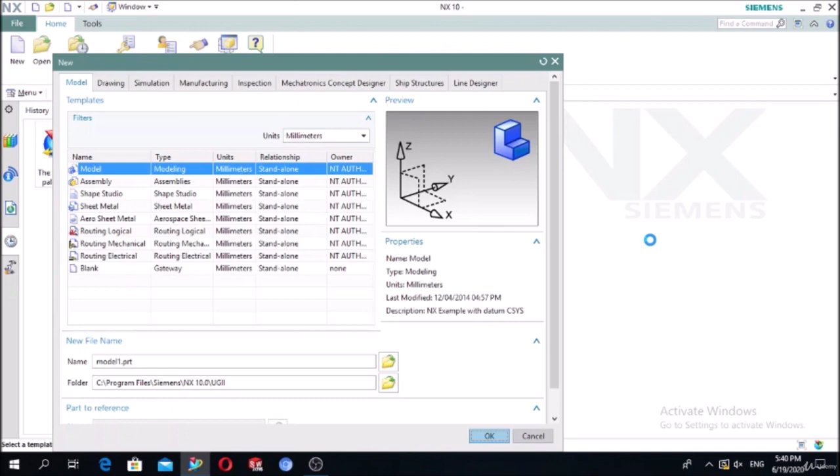The extrude is a process of taking a two-dimensional profile and converting it to 3D by giving it some thickness. A simple example of this would be taking a circle and converting it to a cylinder.

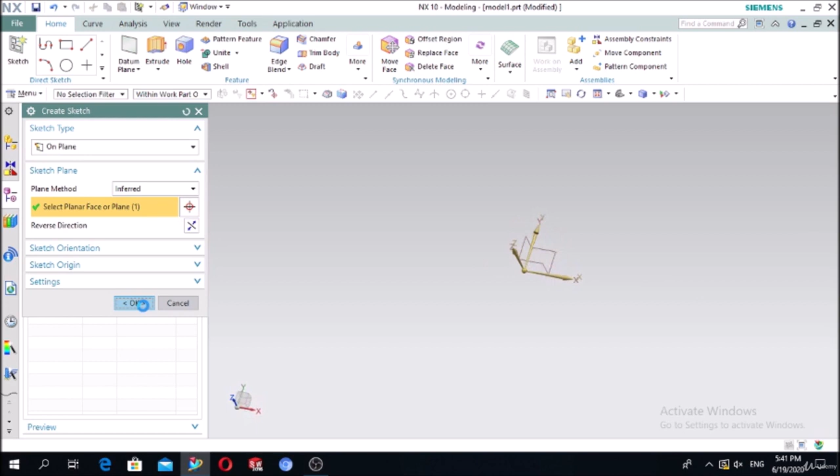Once you have created the sketch profile you want to extrude, activate the extrude command. So let's first draw a simple two-dimensional sketch. Select the plane, press OK. Let's draw the first rectangle and put the dimensions. For example, here is 150 millimeters and the height is 80 millimeters.

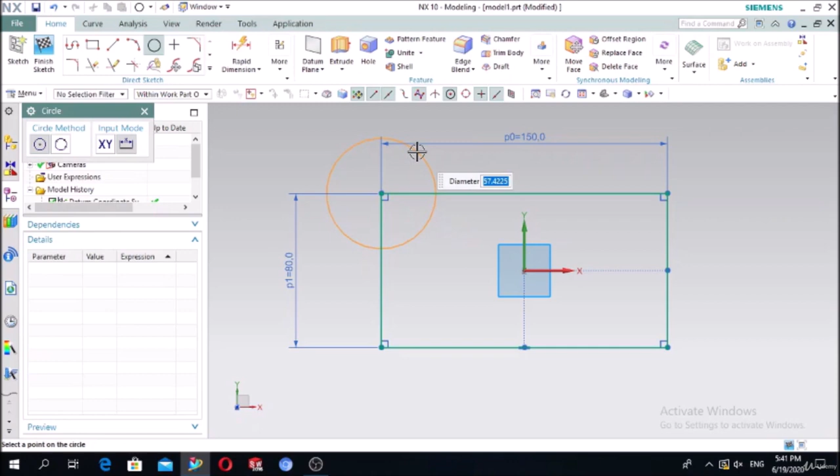Then, for example, we can add the circle by the center, and put the dimension for the circle. For example, you can make it 70 millimeters.

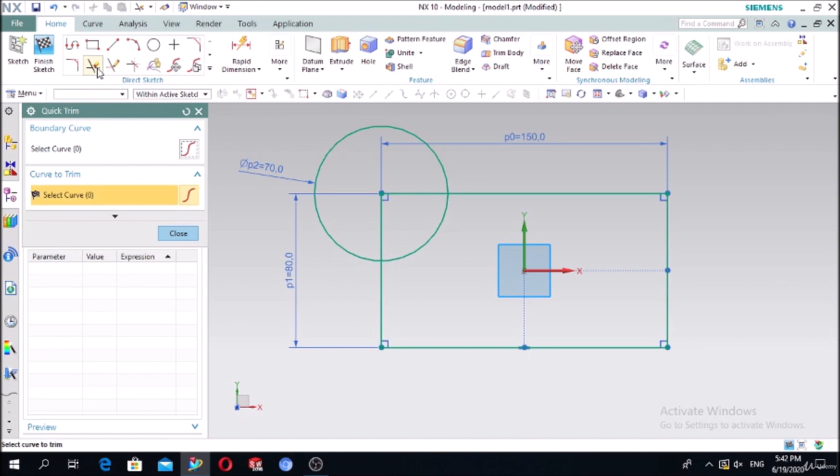If you extrude this sketch, it will not be extruded because there is an intersection between the circle and rectangle, so it will not extrude. In order to extrude, your sketch should be unique and closed. So we will use the quick trim function to cut off the unnecessary sketch, this one and this one. Now it is an open system, and this is a totally closed system, and we can make the extrude.

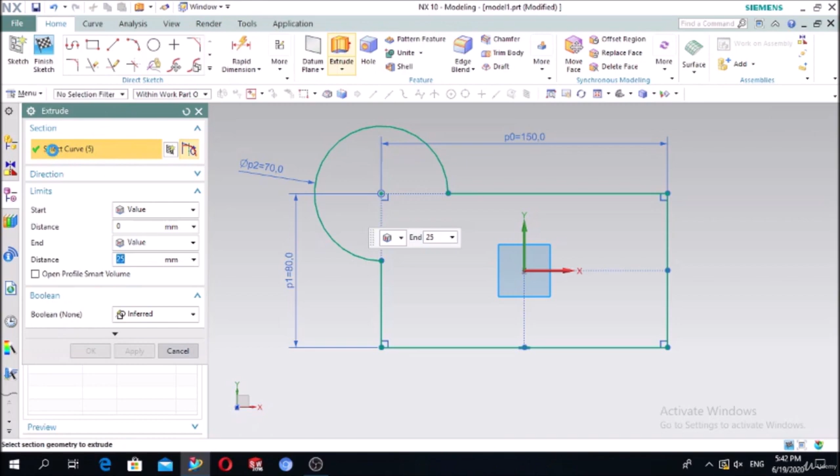In order to make the extrude, in the ribbon bar there is the extrude function, press this. In the select a curve option, you have to select the curve. It's automatically selected, you see here it's selected.

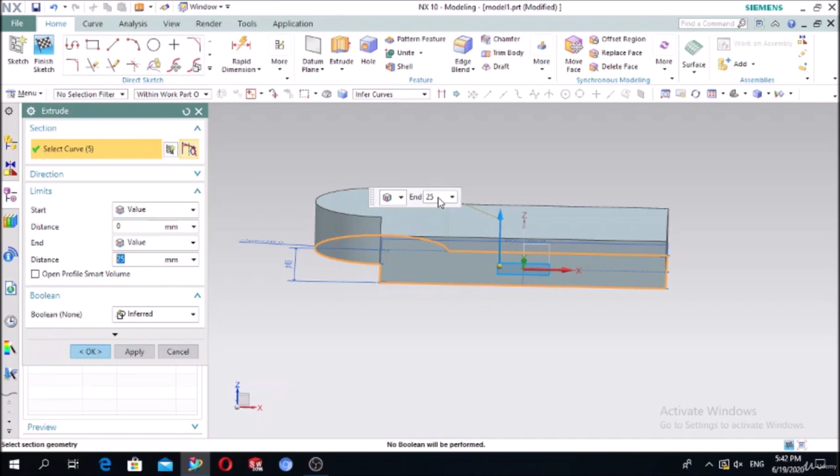Here you can define the thickness of this sketch. In this case it's 25 millimeters, in the upward direction. If you press OK, you will get a solid function extruded from your sketch.

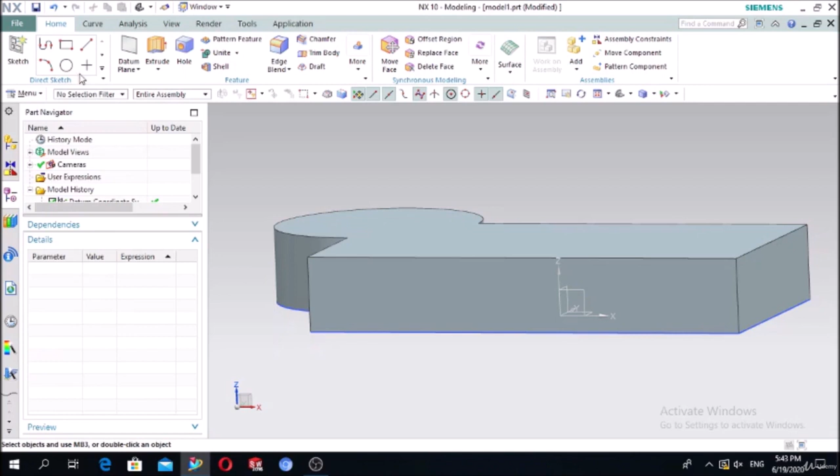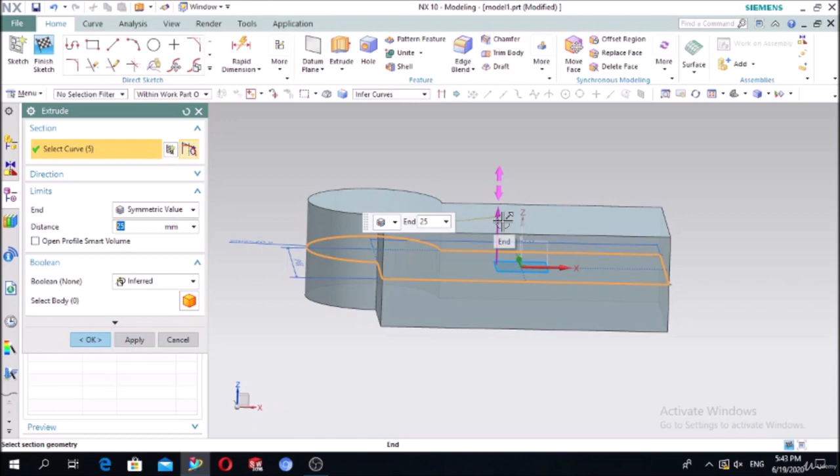In a similar way, if we return to the sketch, we can make symmetric value options in the dialog bar. If we press extrude and open the start point option, there is the symmetric value. If you select the symmetric value, the sketch will be made symmetric, 25 millimeters upward and 25 millimeters downward extruded, so the total will be 50 millimeters.

So if you press OK, you will get the extruded sketch with 50 millimeters in width.

Next is the revolve feature. Revolve is a process of taking a two-dimensional profile and revolving it about the center line to create three-dimensional geometry shapes that are axially symmetric. While creating a sketch for the revolve feature, it's important to think about the cross-sectional shape that will define the 3D geometry once it is revolved about an axis.

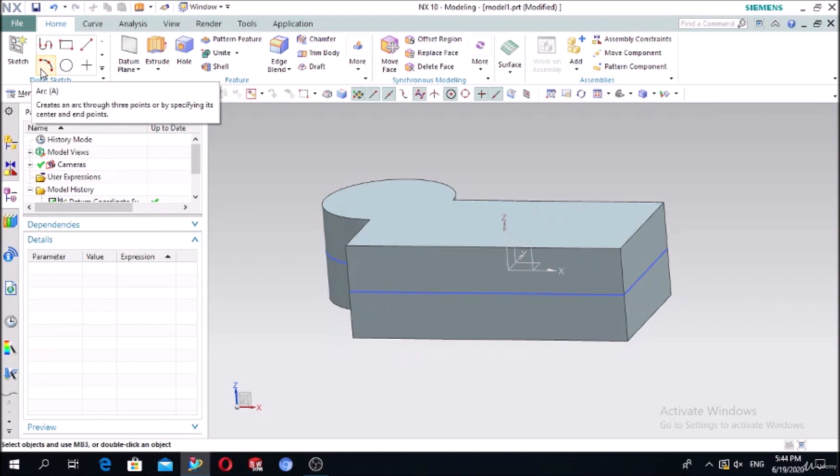So let's open a new file. Let's first delete this extrude, select the extrude, delete this sketch. Sketch, select plane, press OK.

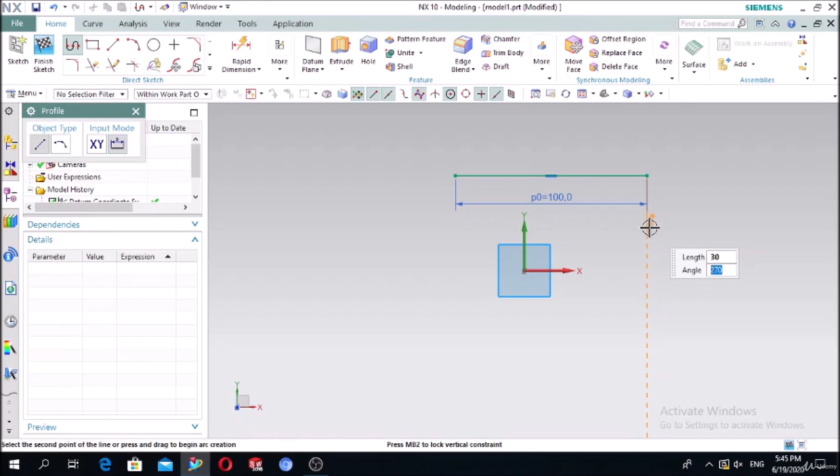In order to make the revolve, let's first draw one simple sketch. Let's select the profile and draw a line, let's make it 100, and draw one line, let's make it 30 millimeters, 30 millimeters, and this one, let's make it 33.

Downward it is 50 millimeters, and here we can make the same length, and this one also let's make it 40 millimeters, and this is the same length, and this one too, and this is let's make 33, and it is let's make it 50, and vertical, so 90 degrees.

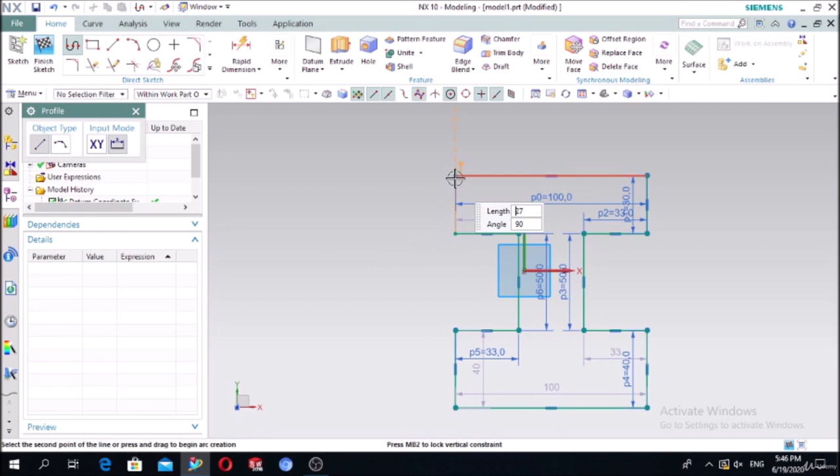This one and this one. Okay, we've drawn the sketch.

Now let's draw one line here, it's a center line, in order to make the rotation around this axis, and convert it to the reference, and the distance between this and this is 25.

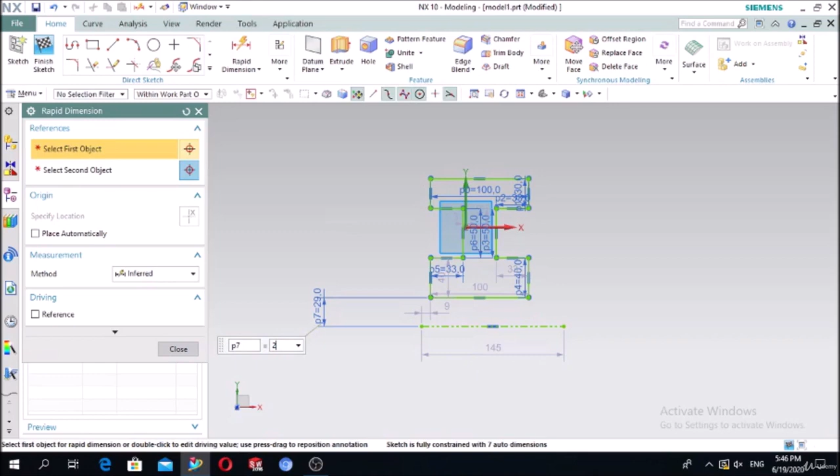Okay, 25. And if you open the extrude menu, there is the revolve function. Press the revolve, and for select the curve, select this curve, it's selected automatically by NX.

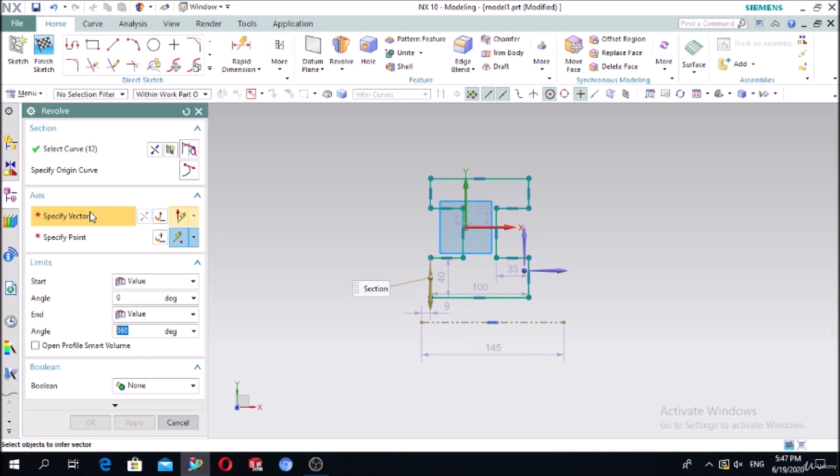Specify the vector. For the axis or vector, select this axis, so it's the axis of rotation, and you see the sketch is revolved around this axis.

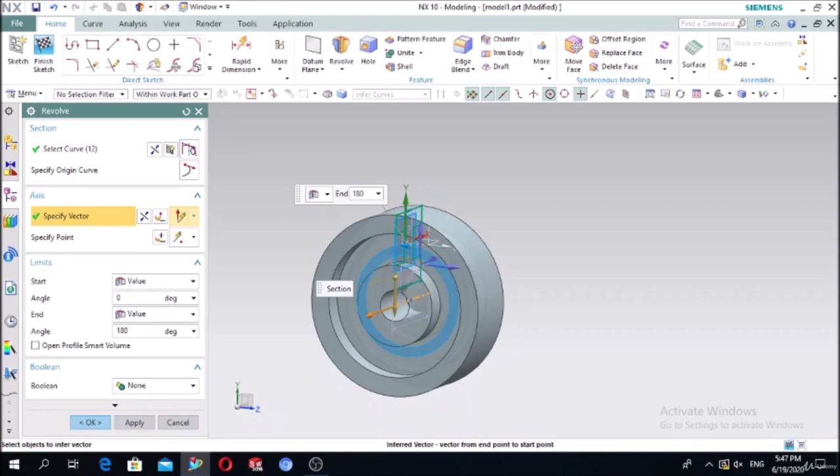You can set the angle of rotation. In this case it's 360 degrees. For example, if you write 180 and press enter, you see it's half, 180 degrees, or you can make it something else.

270 degrees. So you see this is revolved around this axis, so this is the revolve function.

In the extrude function, there are several additional options for the extrude command to be added to the three-dimensional geometry. Now we will see these functions.

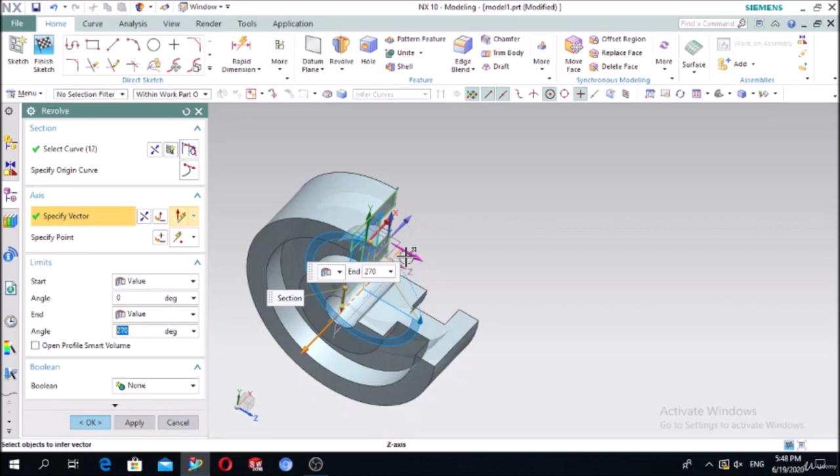So you see this is revolved, let's delete this one and delete this one. Let's select a new sketch, for example select this plane and press OK.

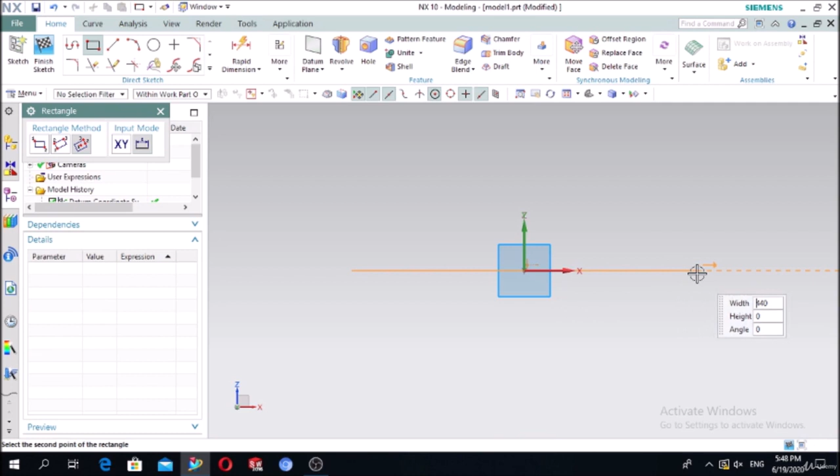Let's draw a rectangle using 3 points from the center, and put the dimensions using the rapid dimension. For example, the length is 200 and the height is 150.

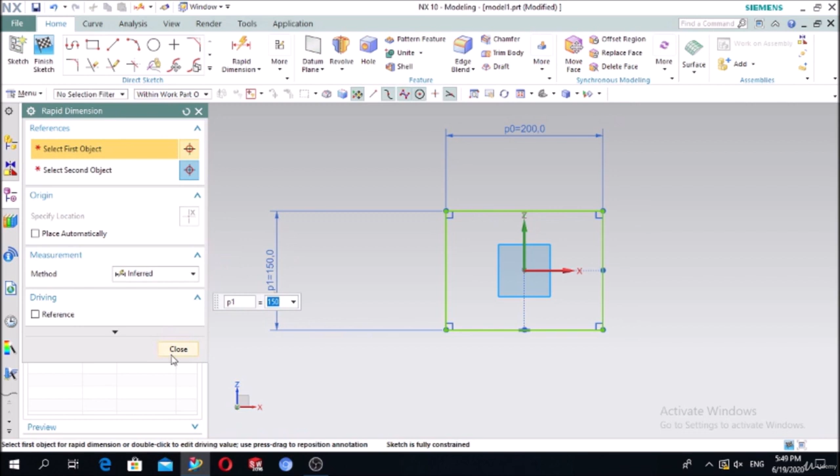Then extrude it 50 millimeters, select distance 50 millimeters, so it's extruded. Press OK.

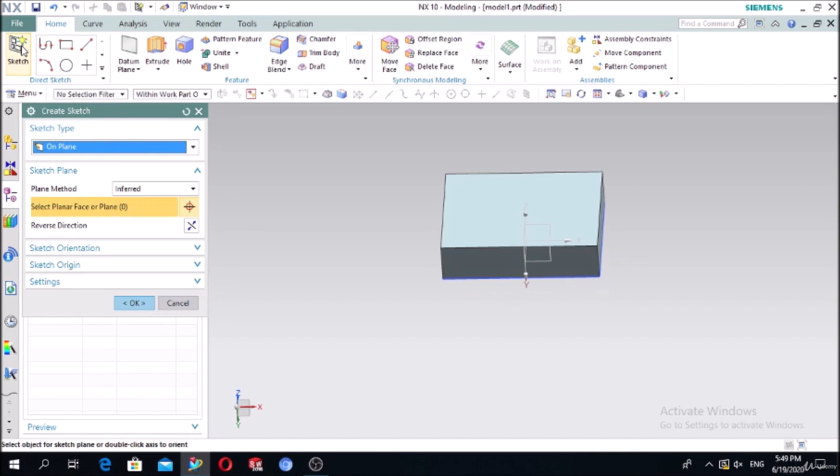Select the sketch again, select this face, you see it becomes red. Select this face and press OK. It will be normal to this face.

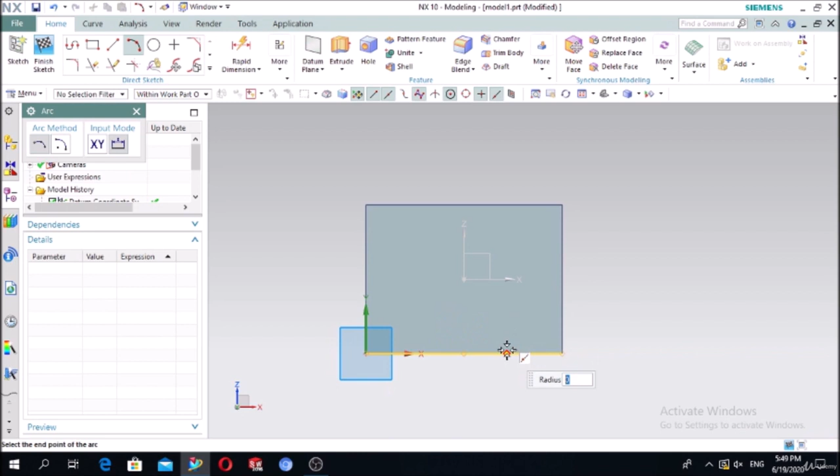From here select the arc using 3 points, so draw the arc. Put the dimension for this arc, for example the diameter is... diameter, 90 millimeters. Also you can make this symmetric.

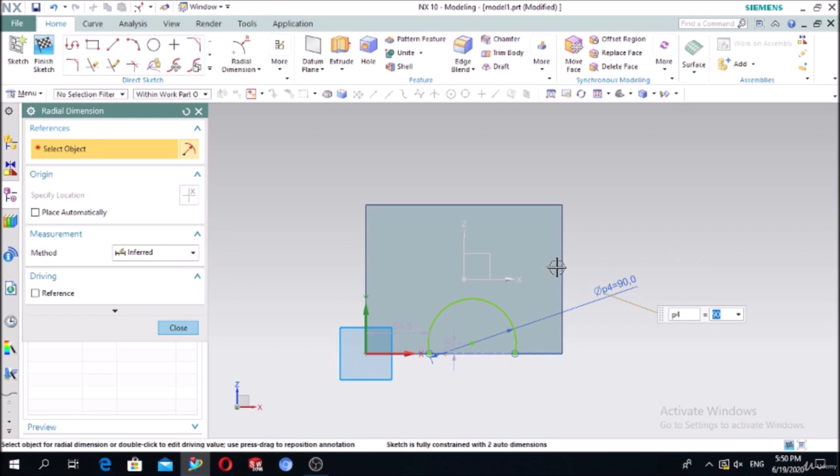If you remember, there was the symmetric function. You can make this one and this one symmetric around this x-axis. It will become symmetric.

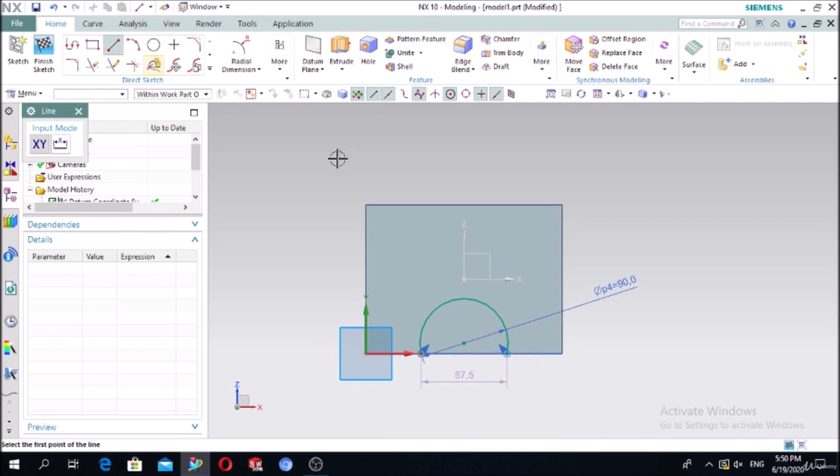So now I would like to extrude this arc, but in order to do this, first we have to close it. So I have to close this point using a simple line. Now you see it is closed, and I can extrude. If I don't close this line, the arc will not be extruded.

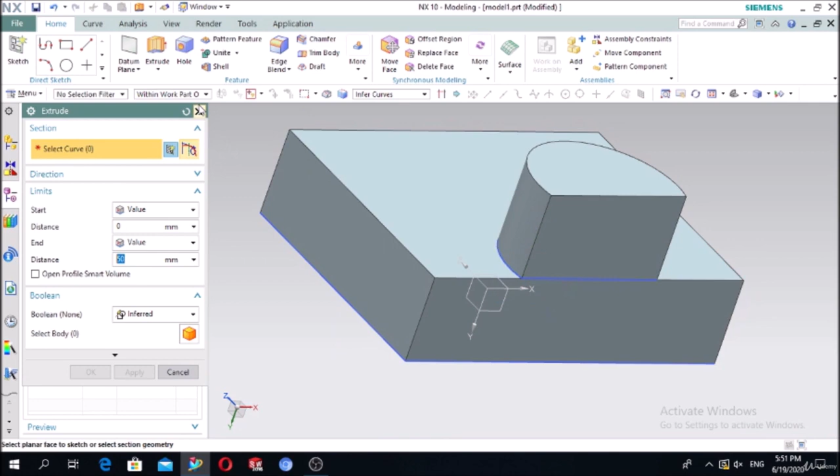So extrude, you see it is extruded. This is one way of drawing more complex shapes. So another way, for example, let's close this extrude and close this one. Okay, I will show one more thing one more time.

Extrude this arc, and here you see in the boolean there is the unite function. It means if you press unite, and in the selected body you select the rectangle that was extruded before, it will unite the two elements. They will become one element.

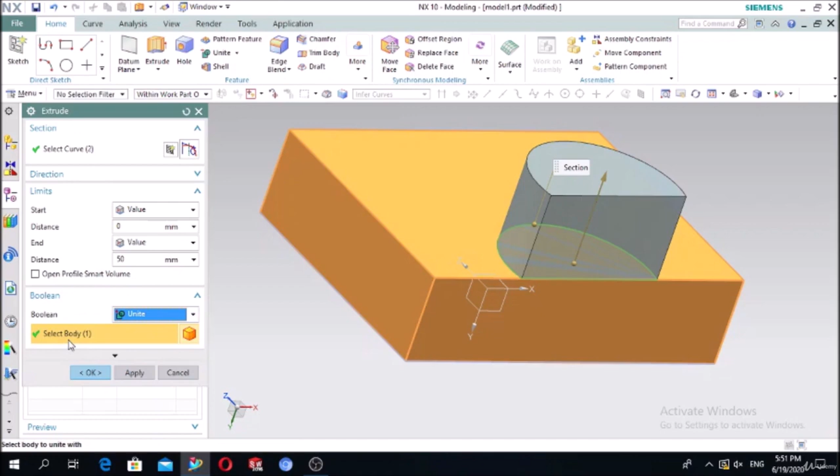So always when you make this kind of sketch, you have to make unite of two elements. Press OK, so this one and this one become one element. Select this one, from here select this one and delete. Let's remain this arc.

Let's now see how to make cut/subtract options. So select the extrude, and for the curve select this arc, and from the boolean you see here the subtract. The direction is upward. From the extrude function, open the direction and make reverse direction, so it will be downward. If you press OK, this arc will be subtracted from this rectangle.

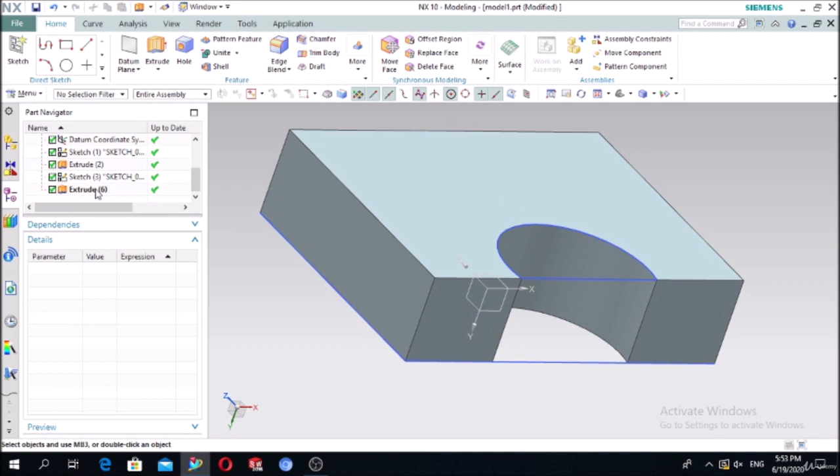This is one way of making the subtraction option. So let's delete this one and remain the initial rectangle. Press extrude again, select this arc, make reverse direction, and open the boolean, there is the intersection function. If you make the intersection and press OK, this rectangle will disappear. Only the remaining part will be the intersection between the arc and the rectangle, so the arc will remain.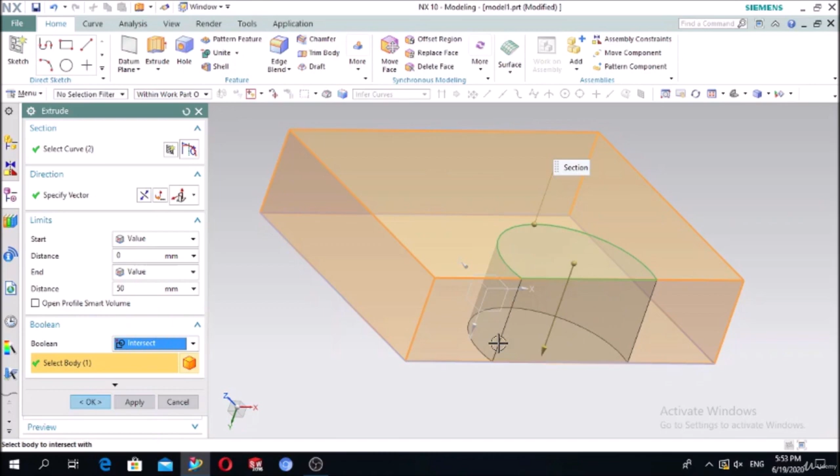So you see it is an intersection. We have seen unite, subtract, and intersection. This is the methods of boolean in the extrude function. Next are other functions, called limits.

On the extrude dialog there is a limit section, with a starting and end point. The limit section has various options to define the start and end limits of the extrude feature. If you open the start point, we have seen the symmetric value only, and we will see the other options in the limit, both from the start and from the end.

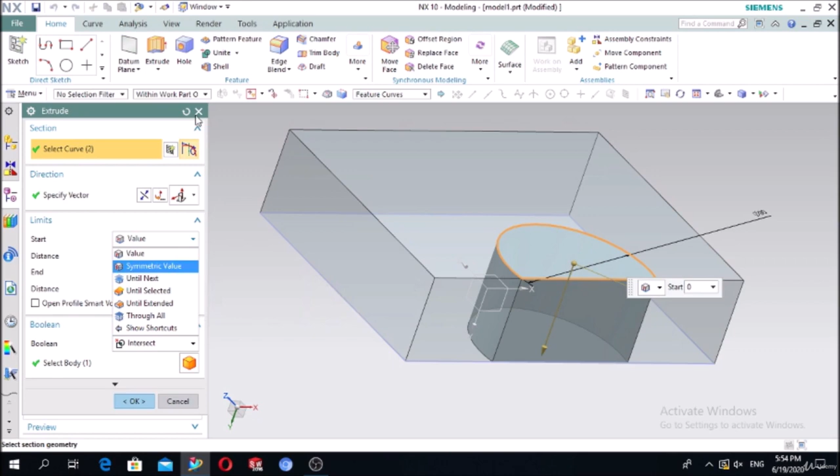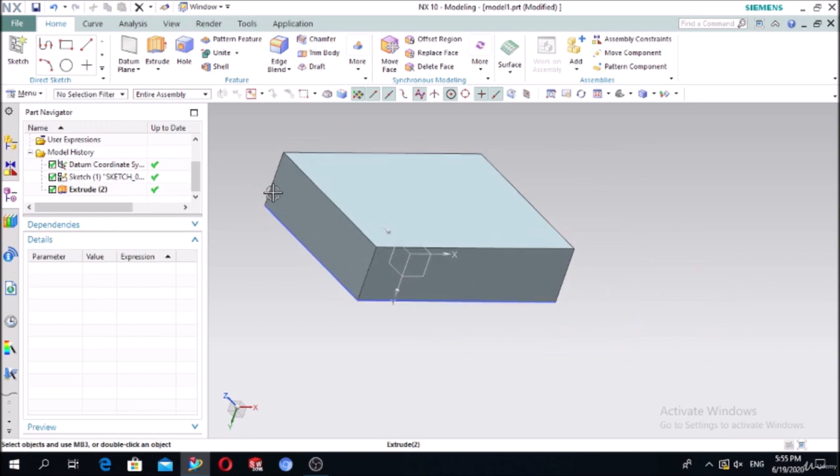Let's start with the first one: until the next. In order to see how until the next is used, let's first draw one rectangle. Let's delete this one and delete this one, and let's remain this rectangle.

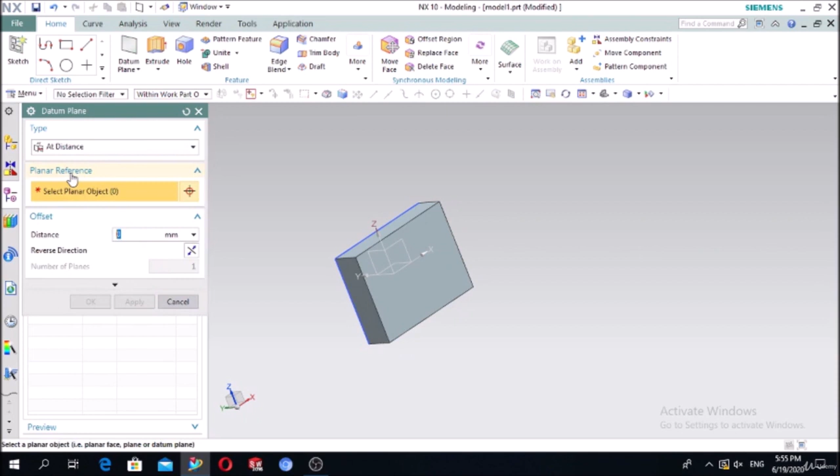Here you see the datum is an additional datum plane. We will see how to put additional datum planes on existing sketches in the next lesson. Now let's select datum plane from here at a distance, and select this plane, this face, and set the distance, for example 40, or bigger, 80. Let's draw two datum planes and press OK.

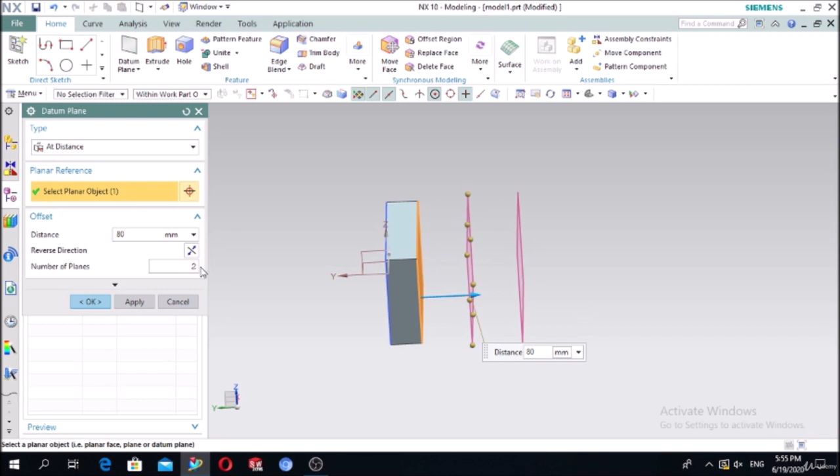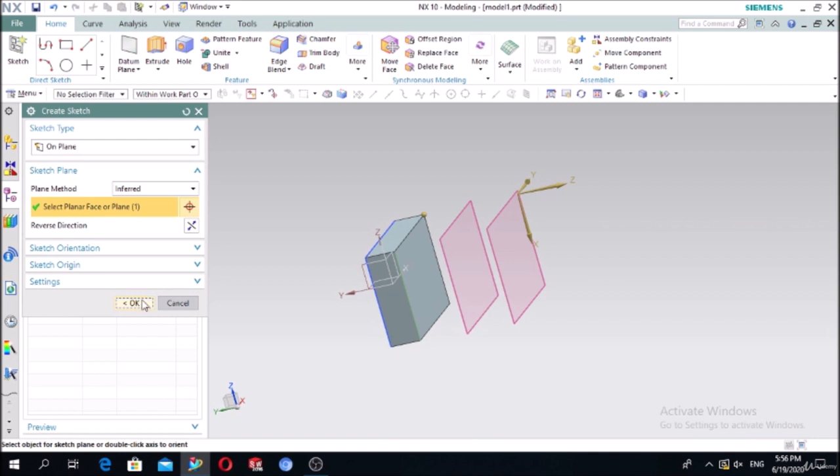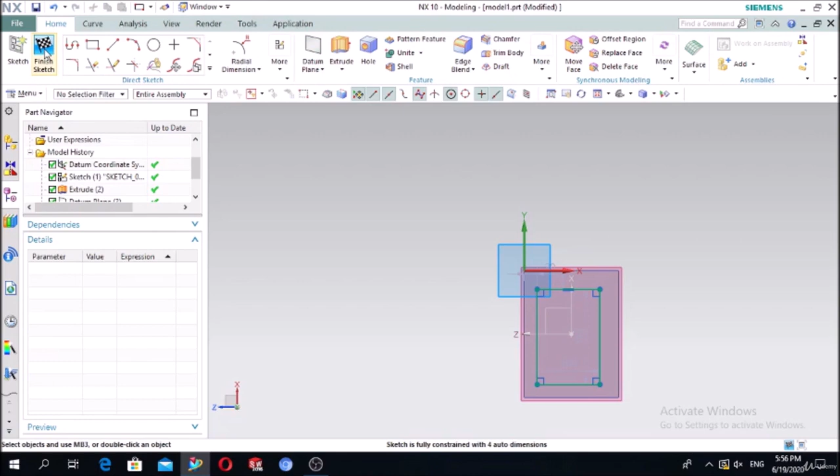So two datum planes starting from this plane are created, 80 millimeters from here and 80 millimeters from here. Press sketch and select this datum plane, press OK. Let's draw one rectangle here with two points, then select finish. So the rectangle is created in the plane, and make it extruded.

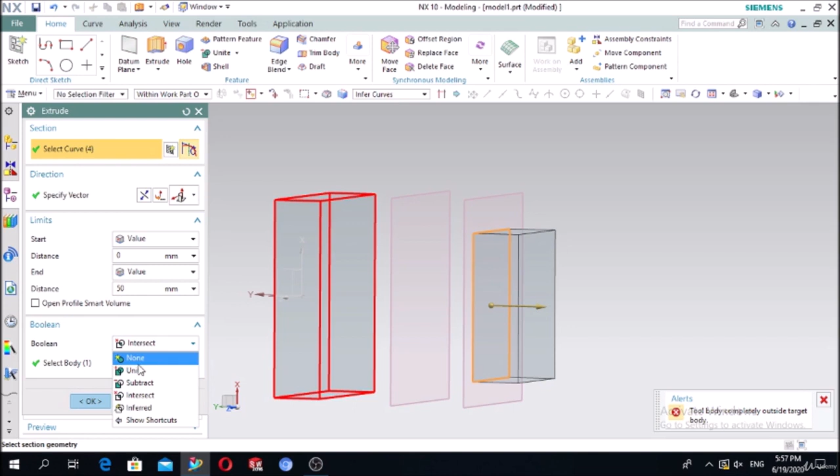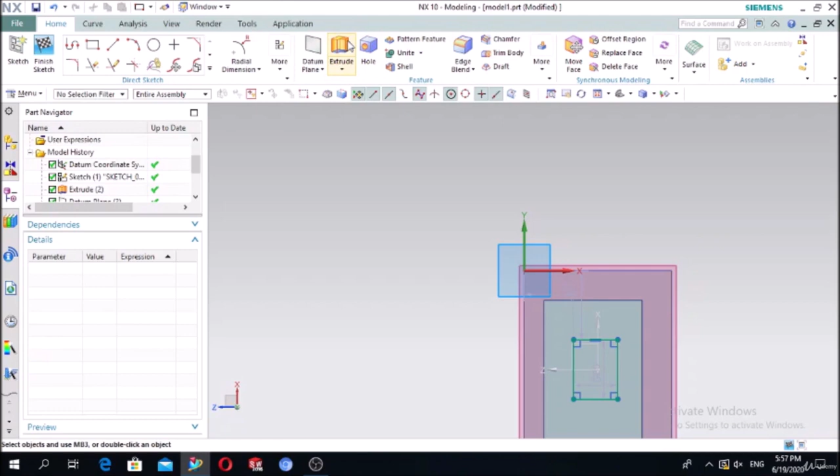This is 50 millimeters. Press OK, there is a mistake because it made an intersection, but it's created. Select this sketch, this plane, press OK, and draw a smaller rectangle, extrude it.

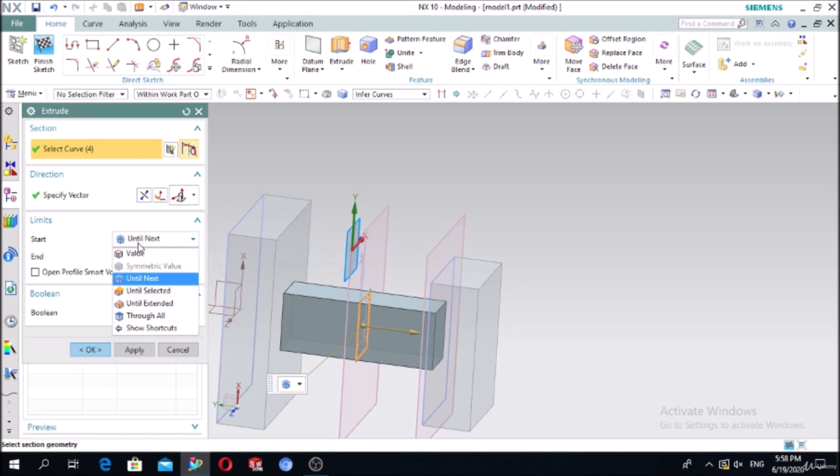So if you select here and set the value to until the next, you see the end value automatically goes until the next extruded feature. If you select the starting point also as until the next, the starting point will be until the nearest extruded feature. This is until the next. If you make it a fixed value, it will disappear. This is how to use the until the next limit function.

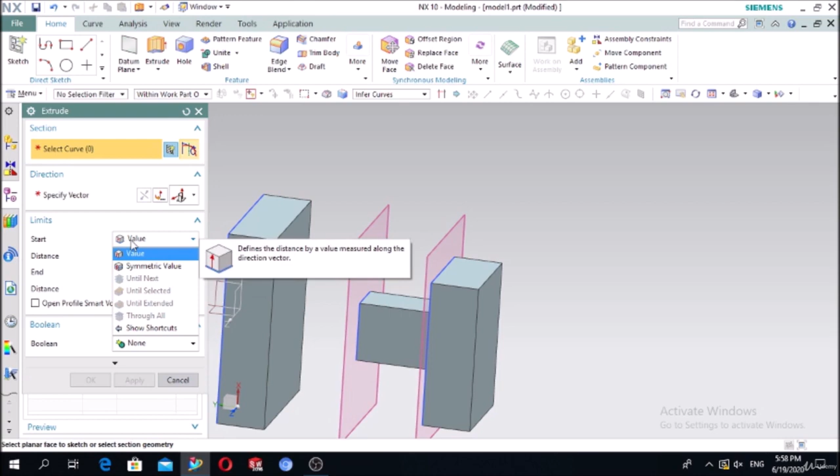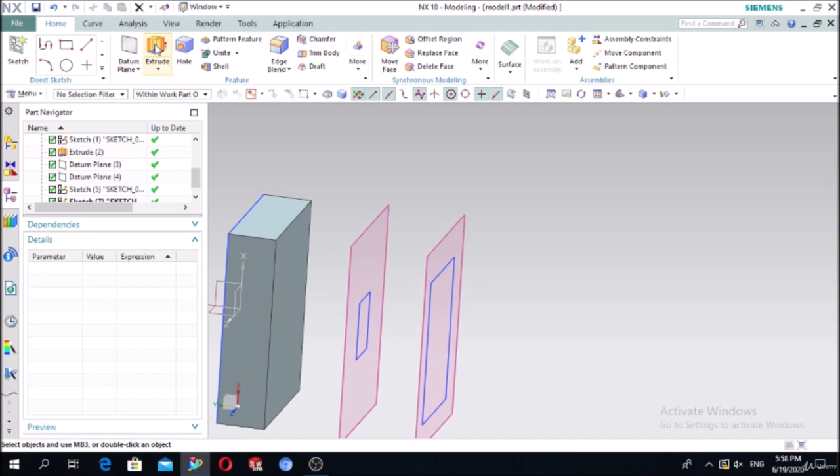In the extrude, next one is until the selected. Press OK, it will remain, and select this one. Let's delete, delete this one, let's remain this one. Extrude, select this one.

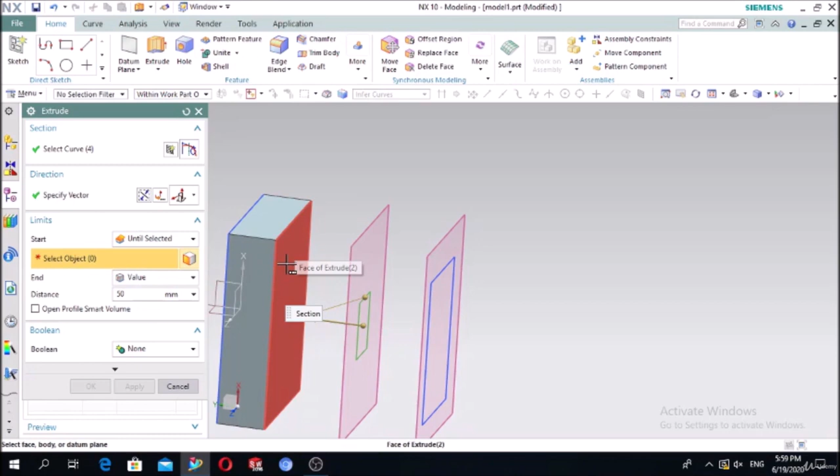Until the selected here, the value is until the selected, and the direction matters in this case. Let's reverse the direction until the select. In this case you have to select the face where you want to extrude this rectangle. So let's select this face, you see it becomes red. If you select this one, let's make it 0.

So it will become extruded until this face. Press OK, this is one way of making the extruded function.

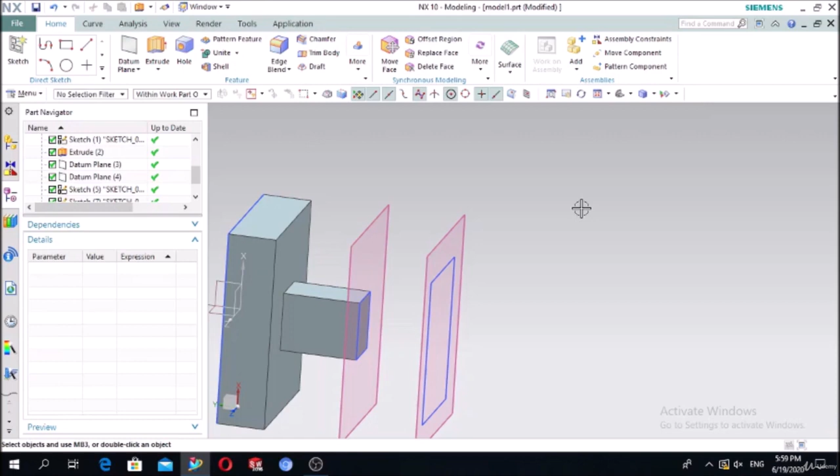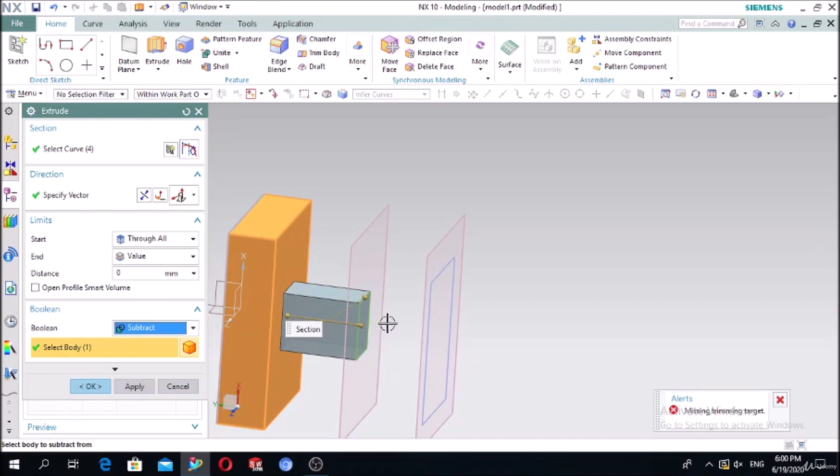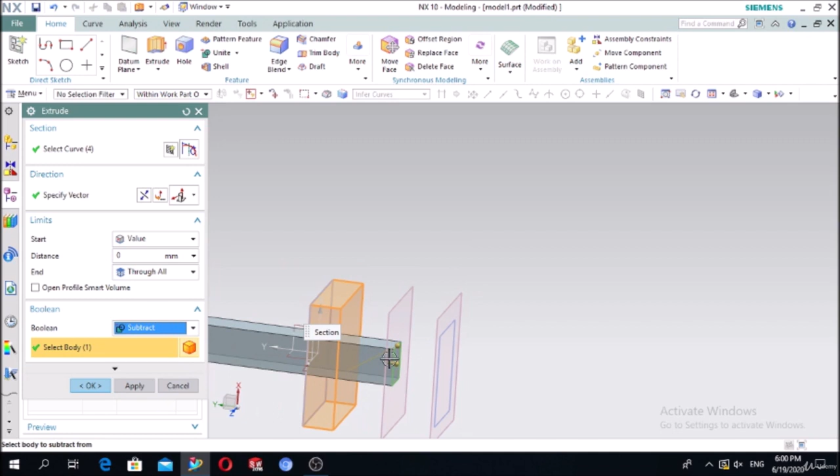Next, let's delete this one. Next, let's select extrude this one, here the through all. If you select through all, and from here subtract, this one will go through all of this. Here let's make it 0. You see it goes through all, subtracting around this bigger rectangle, so it is subtracted.

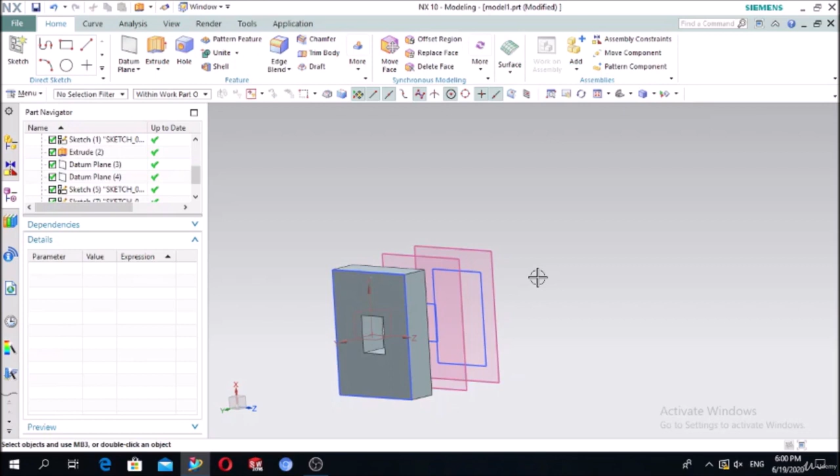That's all of today's lesson. On the next lesson we will see how to put the datum planes on existing sketches.